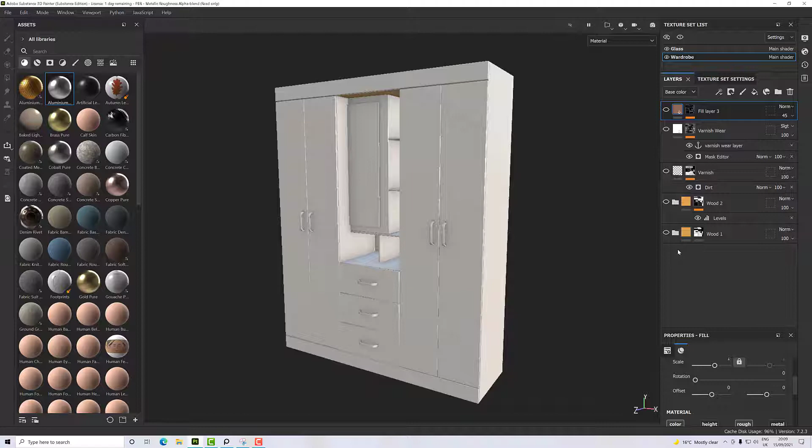Hello and welcome to this Substance Painter tutorial where we're going to be building up some wood on this furniture piece. Essentially we'll build up some layers from bottom to top to build a nice wood texture with some variation and dirt and wear. We'll start off with these bottom two layers, which will build our basic wood texture, and then on top of that we'll add some varnish and some varnish wear, and finally some dirt to give us a nice basis for a model. You can take it further than here, of course, but in this particular video we're going to leave it at that.

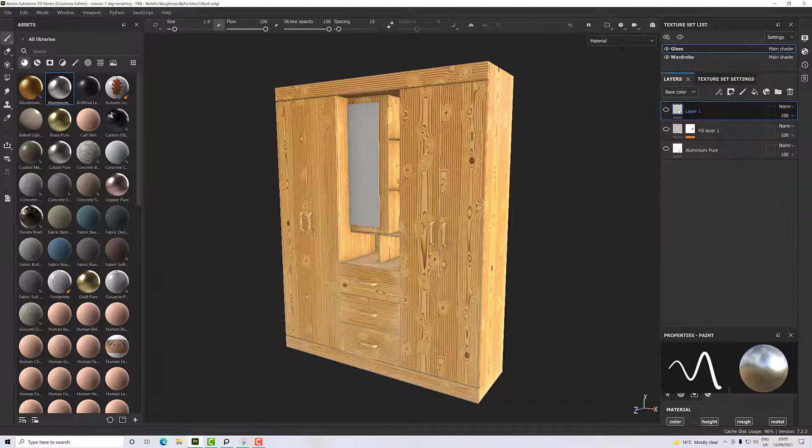And then on this glass, which is a mirror, we'll add in some details. You might notice that I've added in some textured model detail to the top, and we've got a mirror and we've got some smudges and dirt on the mirror. So that's what we're going to learn, and I hope you enjoy it. I hope you get something from it, and I'll talk to you in the next section.

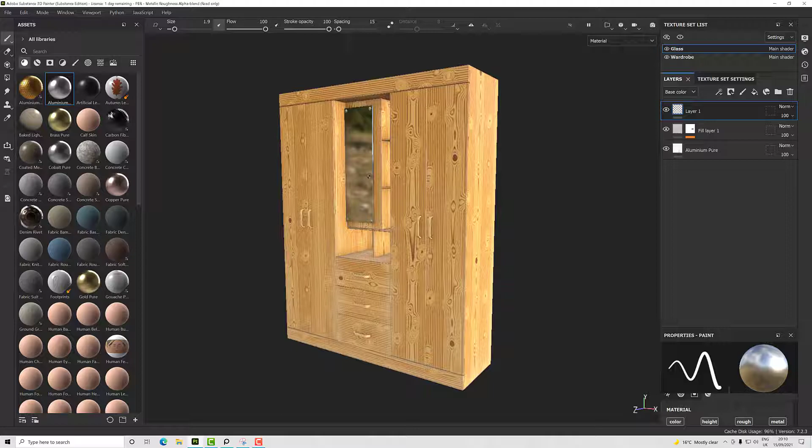Okay, so let's get cracking and create our project. So it's File, New. I'm using PBR Metallic Roughness Alpha Blend, and I'll go to Select and select out my model, and then I'll set my document resolution and normal format DirectX. Use OpenGL if you need to, and other than that I'm going to click OK.

Now the first thing I want to do in this one is bake my maps, and then just show you why sometimes it's a good idea to refine your maps. So let's go over to our texture set settings and click on the little box with the cross and bake the maps out. I'm going to bake them by default to start with, and then we'll have a look at them.

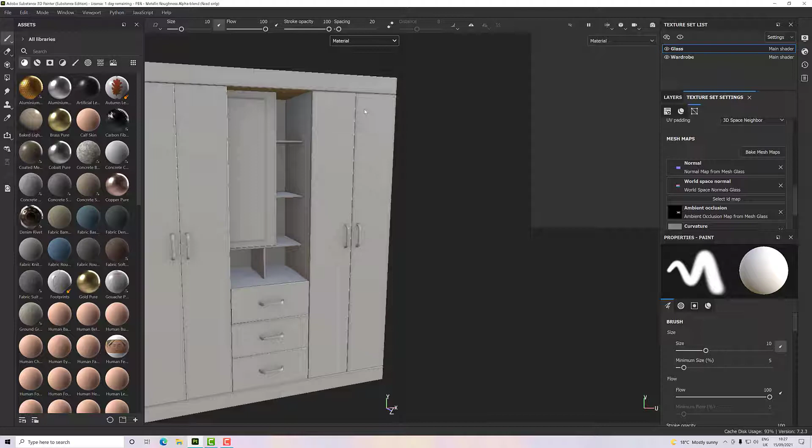So what I want to look at here is my occlusion layer. Under mesh maps, ambient occlusion, you'll see it's very dark in the shelf area because there's no light getting in there, not much light at all. And if we use that as an effects map, it's not going to be very good because it's going to spread that effect all in those places. It's going to be very concentrated.

So what I want to do is adjust my baking to get a better result. What I'm looking for is the occlusion between corners and edges and such like. So let's look at that. Back to our baking in the maps, and actually I'm going to put this up to 2048 as I should have done, and we'll rebake everything.

On ambient occlusion, I'm going to change my maximum occlusion distance. If I change it down to say a half, and then click apply to all, because in this particular object I have more than one material, I'm going to bake those out and see what effect it has. There we go, not an awful lot.

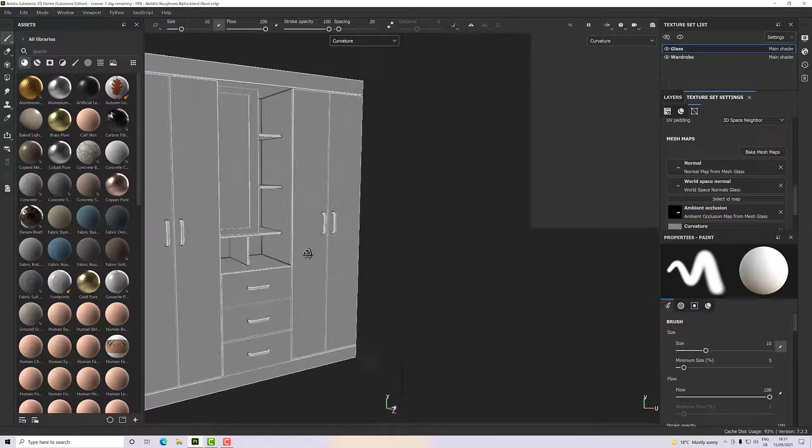Yeah, so it's starting to really come and delineate between the two. Okay, so that's baking our maps out. I'll just switch back to my material mode, and this is our kind of starting point.

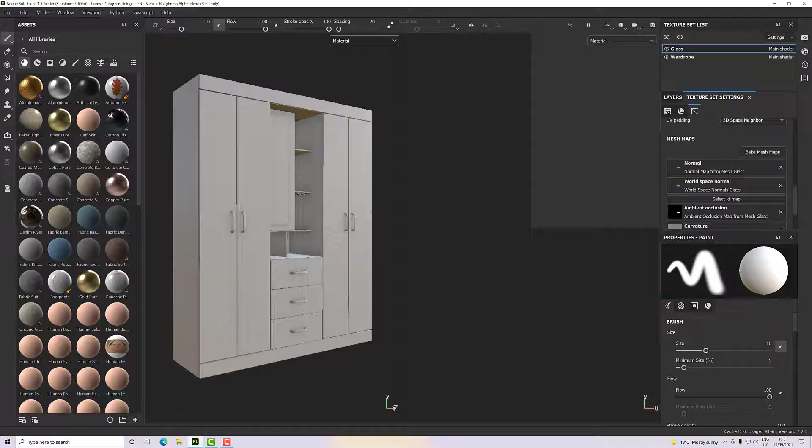So in the next section, what we'll do is build something that looks like wood, and we're just going to use functions within Substance. We're not going to use any images or anything. I'll deal with images in another tutorial set, so I'll talk to you in a moment or two.

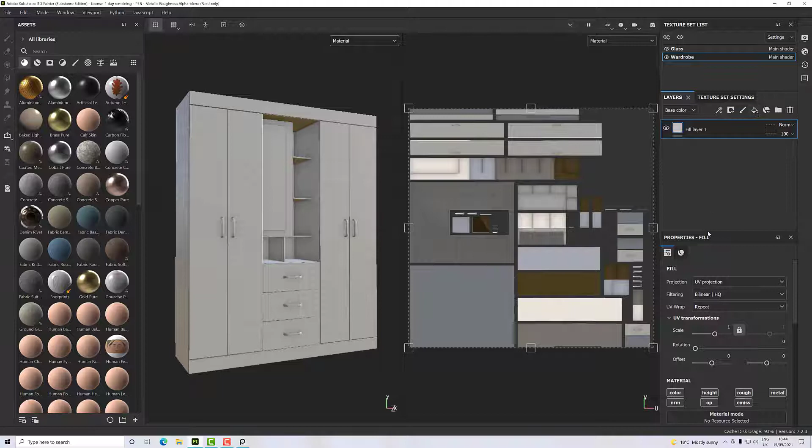Okay, so we're ready to start texturing now, and I've just switched over to my wardrobe material. I'm going to go to layers and delete this default paint layer. Now what we're going to do is use a texture function and a color gradient to make something that looks like wood. So in here we'll first need a fill layer, and for this fill layer I don't want anything except color, and there's a reason for that which we'll get to in the next section.

So then in our textures, in my filter I'm going to type in wood, and we've got this wood 01 here, which is a pretty good approximation of a wood pattern. So I'm going to drag and drop that into the base color. First of all, it's way too big, so I need to update my scale on my UV tiling. I'm going to set that to about 4, and now it's giving us a kind of wood look, but there's no actual color on it.

So to turn this from black and white to color, we add a filter, and the filter we select is gradient. By default the gradient gives you 3 colors to work with. I'm going to need a few more colors than that, so I'm going to go up to 6, and to set this up so it makes a little bit of sense to me, I'm just going to change my colors here.

So I'm starting with black, and then we'll go to a dark grey near black, and then a little bit lighter than that, and then a little lighter again, a little lighter somewhere near white, and then finally we'll go to white.

And now we need to set our position. So the color gradient works on the position in the gradient where this color kicks in. So our color 1 should be on 0, and then we need to kind of equally divide, to start with at least, between these ones. If I set 0.2, 0.4, 0.6, 0.8, and then the last one will be 1.

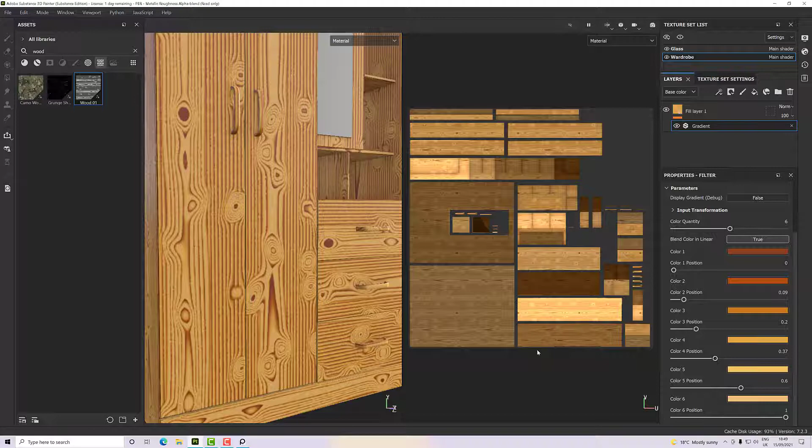Now you might decide later on that those colours aren't right, or you want to lighten some up or darken some even. You could always do that at any stage in the operation essentially. Let's take some of the... there we go, somewhere around there.

Okay, so what we have now is a very basic wood, and what we're going to do in the next section is start to build on this wood to give it some character, and then we'll build layers on top of it to break it up and make it our own, and make it look a lot more like wood. Okay, so I will talk to you in the next section.

Next then, I'm going to add some variation in terms of how shiny and how our height is generated, and I'm going to do it on a different layer. Now you might think it's a bit pointless, but I have my reasons, so as I go, I'll explain why.

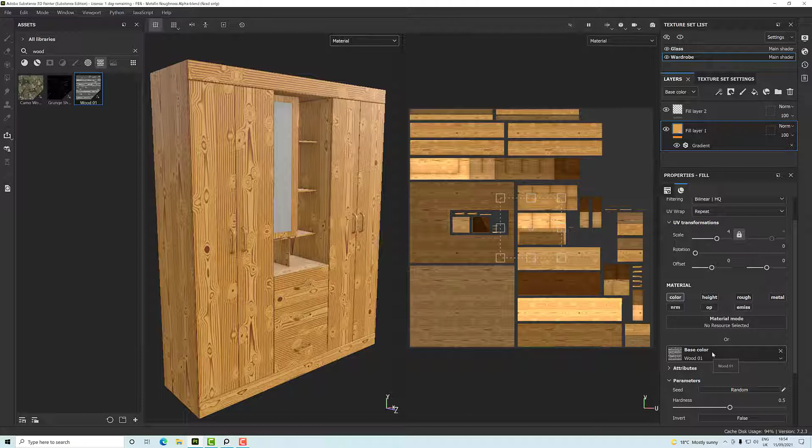Let's add a new fill layer, and this time I'm going to turn off everything but height and roughness. Now if I want to use this function again, this wood, base wood, I would need to put it in each channel with identical settings, and if I have a lot of channels that's going to take me a while.

So what I'm actually going to do is, to this layer I'm going to add a black mask, and on that black mask we're going to add a fill layer, and that gives us a chance to drag and drop our wood in.

So on our original, we made a couple of small changes. Hardness and knots is 1, and here we have hardness and knots is 1, that's fine, but our scale is 4. So let's update the scale, because we want them to match, we want them to be exactly the same settings. So now that I've done that, I can go and have a look at my mask, and should see that it actually matches the underlying very, very well.

And now if I increase my height and increase my roughness, I'm going to get some variations. So let's go to the roughness layer to start with. It's a little difficult to see, but if I increase that, you'll see we get some very white areas, and if I decrease it we get some very black areas. What I want is somewhere towards white.

And similarly on height, if we switch to the height channel - where's the height channel? There it is. We can adjust this down. I only want a very small value, and you'll see that darkened up quite a lot there.

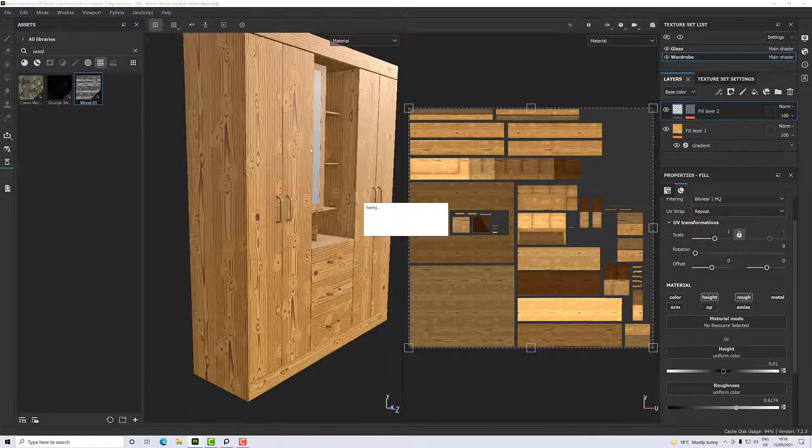So now we've matched those to our original. I'm going to group them together. So I'm going to add this folder and then grab my 2 layers and drag them in, and I'm just going to call this Wood 1.

Because what we're going to do in the next section is we're going to copy this and update our wood settings, and maybe change a few other bits and pieces, and then we're going to have 2 different kinds of woods on different planks in this model to give us some nice variation. So I'll talk to you in a few moments.

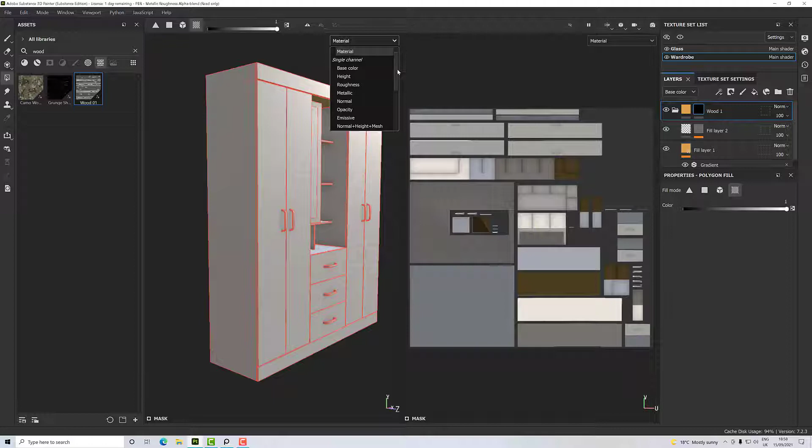Okay, so what we're going to do now is create a mask. We'll add a black mask, and on this flood fill polygon we'll select the islands option. I'm going to switch to the mask view so it makes slightly more sense. So everything is currently masked, so none of this is being applied.

When I select an area, you should see it starts to appear, and I can select in 2D or 3D, it doesn't really matter. You just need to make sure you've got a good amount selected. So there we go, I'm going to select the whole of the cabinet, I think. Yeah, and then one of these doors.

I'm torn between the left and the right. If I go left, it looks the same. Oh, excuse me, sorry, frog in my throat. It's my own fault.

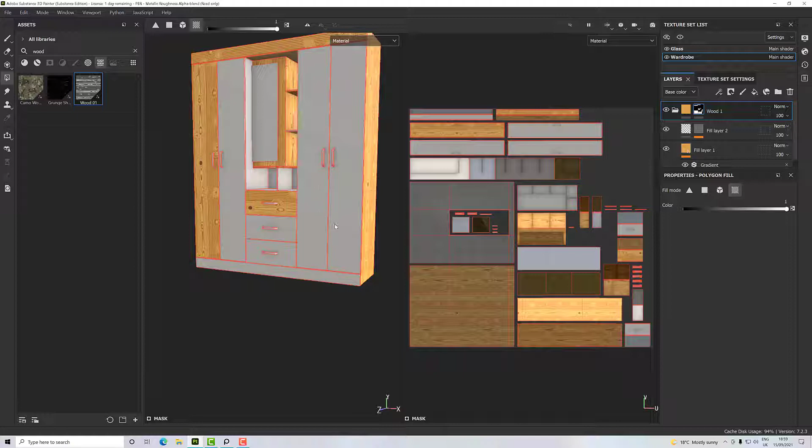So let's go with that one, and we'll pick the bottom drawer, and we'll perhaps pick the bottom of the cabinet and the top. We can always change this as we go. This is just us getting kind of used to it, or getting a start. So what we have now is some bits that are textured and some bits that are not.

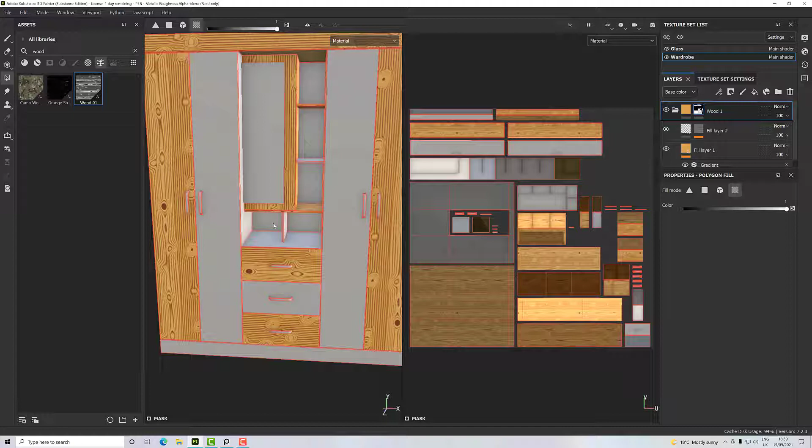So what I want to do is retexture the blank bits with a slightly different wood. I'm going to add a new folder, and then copy these layers. So it's right click, copy layers, select the folder, right click, paste layers, and if I collapse that, yes. So this one I'll call Wood 2.

Because I want them on the opposite polygons to this mask, I'm going to right click on this mask and copy, then right click and paste into mask, then right click on the mask and invert it. Now we're back to exactly where we were, except we have slightly more control now, because on this set we can do some things.

So one thing we could do is select our texture and change it. We've got a hardness and a knots setting. I could really take the knots down on that one, and that will give us a different looking wood. I could take the hardness down, or indeed up, to again get a different looking wood.

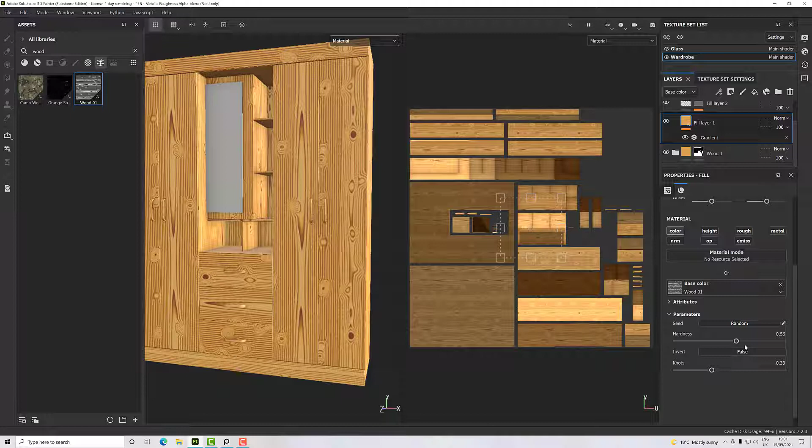But the slight peril of this is that I need to recreate these on my height and roughness layer. So what I do there is just get up the old snip tool and take a snip of the area I've done changes on, then in PureRef I can paste this in, and because of the nature of PureRef I can just go to my other layer and pick my texture and very easily set my settings without having to switch screens or remember too much, because if you recall, I am an old man and prone to forgetting things from moment to moment.

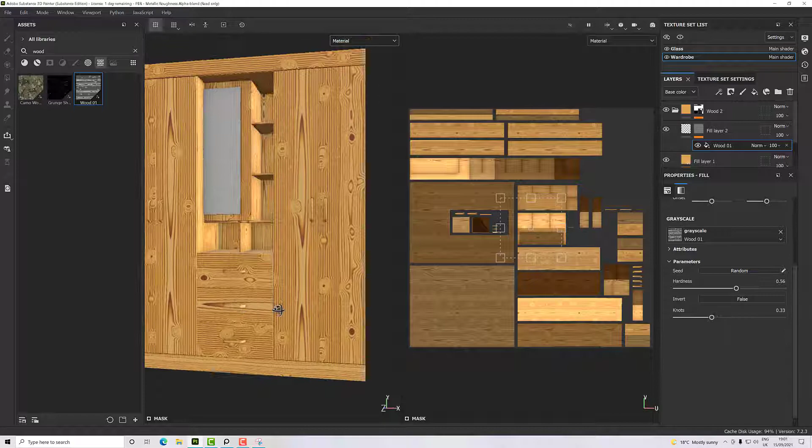So now I've matched them up, but there's not much in the way of change in all honesty. It still looks like it's from the same tree because it's the same colour, exactly the same colourings. So if you wanted to, on the gradient you could change up these colours a little bit.

You could either change them to a completely different level, change the positions, or even just change the colours. So for example, if I really drop the position of colour 4 here, I'm going to get a slightly different look. I could increase the position of 2 and I'll get a different look. So it's just a question of tweaking your parameters to get it looking a little bit different. There we go.

So rather than looking completely the same as the other set of planks, we've got a slightly different look. It breaks it up a bit to give it more of an element of, you know, this is a real thing. Variation is quite important, even at this base level where I'm not really expecting to finish, I'm just expecting to get it to look reasonably good.

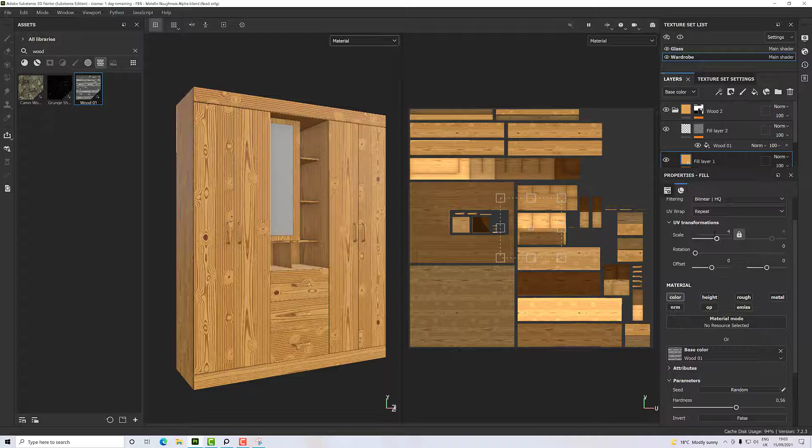Okay, so what else could we do in terms of that? Again, we'd need to be careful about our positioning on the base texture here. We have scale, rotation and offset. We could offset this by moving it around. So if I increase this offset, you'll see it's changing position - offset in that direction or offset in that direction. And I'm rather keen to not have too much in the way of vertical things going on.

And yeah, somewhere around there. And it just so happens that these two planks are occupying what looks like a similar region. So what I actually might do, if I was being really conscientious, is swap those out in the mask.

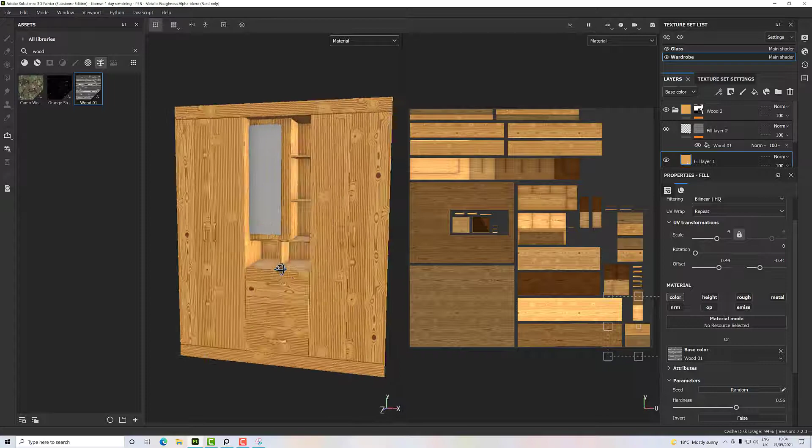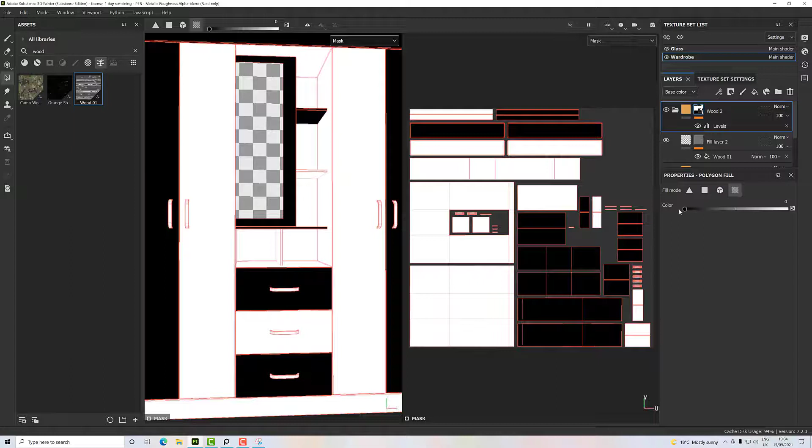And that's relatively straightforward. So if I go to the wood here and click on my mask to show it, I can see this is white. So if I take that down to black and click on it, actually because I've inverted it, it's white. So if I leave it at white and select it, it will remove itself from this one.

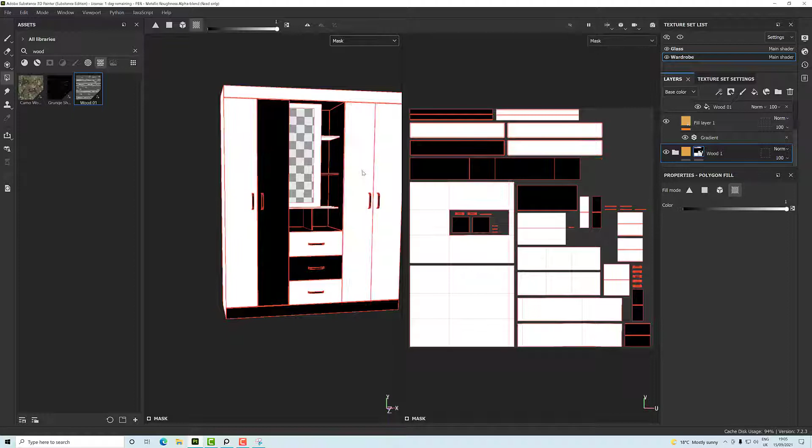But in the material it will have nothing on it, so I just need to go back to this one and change it here. Let's go and have a look. It's not selected here, so I'll just click over that and now it's selected. So when I go back to my material, now it's picking up a different one and looks a bit better.

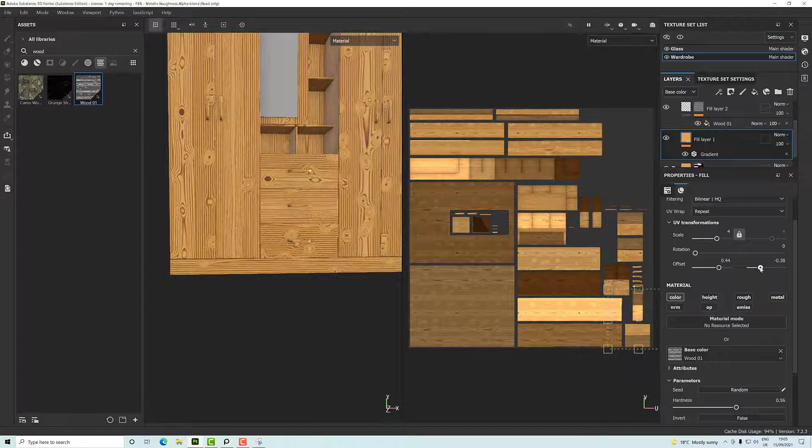I've noticed that when I did my move—let's have a look—that these two now look a little bit similar. So I'm just going to adjust that a little bit so that they're not. There we go, something like that. So that's good, I'm happy with that.

Yes, not a bad start. So I do need to recreate those changes on the height and roughness area. Let's pop that into PureRef so I know what settings I need to make, and go back to my wood and set them in there. So 0.44 and minus 0.38, and that should now line up properly. Let's minimize PureRef, and if I have a look around I should see that the dark areas...

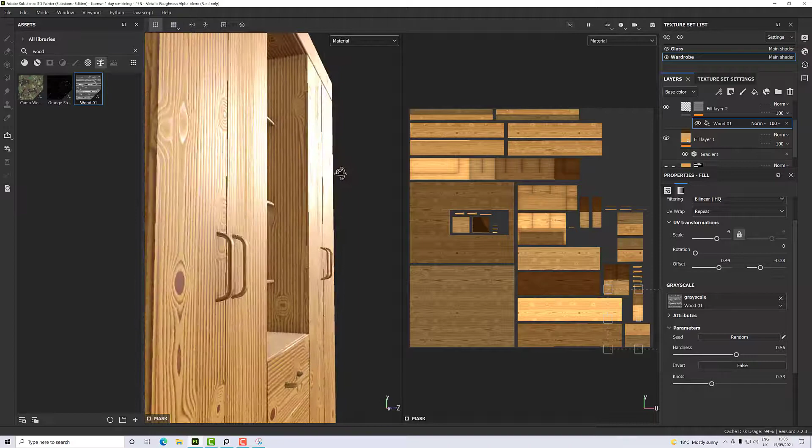In the next little section we'll start to build up some information about where it is. We'll start to wear some edges—on the ground we might put some wear because it's been sitting on the ground, perhaps some wear on handles or something along those lines. Just things about where people might have used it and therefore the feel has changed. So I'll talk to you then.

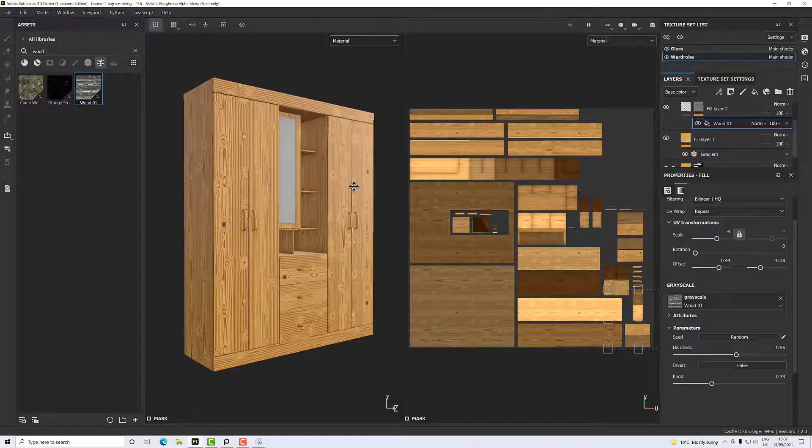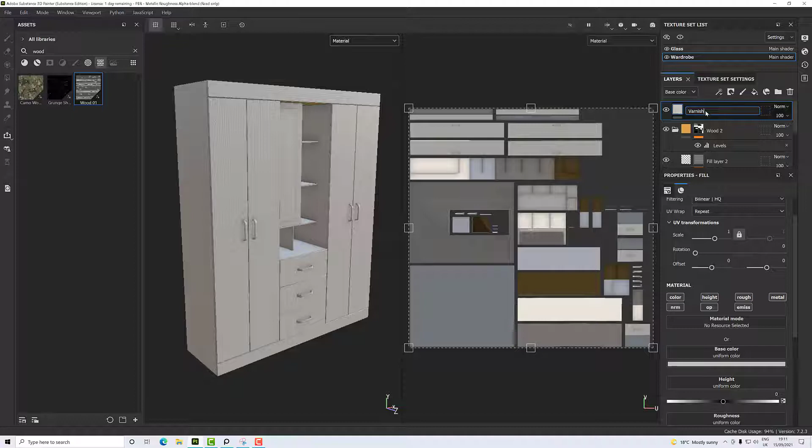Okay, so we have a reasonably nice kind of wood plank effect, but not necessarily varnished. So we're going to add a layer above our Wood 2, and we'll call this layer Varnish. It's a fill layer, and for this one we don't need anything but our roughness map.

There we go. So we're going to set our max level and then we're going to wear it away. If I go right up to white, it's minimal, and if I go right down to black, it's super shiny. So I don't want it super shiny, but I do want it perhaps halfway between black and the midpoint—perhaps a little bit darker than that. There we go, so now we have a very shiny wardrobe which is not really reflecting what's going on underneath.

So that's okay. If you wanted it to reflect what's going on underneath, we could change the blend type on our roughness. Currently it's normal, but if I put it to multiply, it's going to take a little bit of the information from our roughness that we put underneath.

I'm going to leave it at normal for the moment, and then what we'll do is add some dirt over the top of it. So we can either add a black mask here, or we could add a black mask above. I'm going to add it here for the moment. So I'm going to right click, add a black mask, and that will take the effect completely away. And now we've just got our underneath roughness.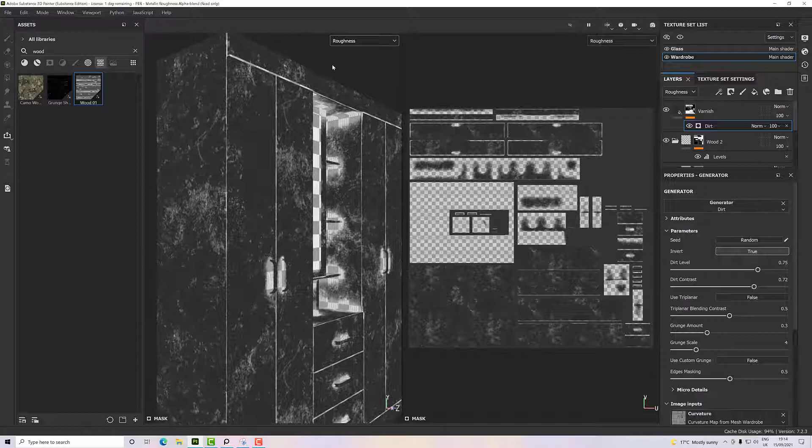So let's go back to our material layer, and now I should have some very subtle bits all over the place where it's not as polished. You see where the shelf meets the vertical here, that's got a lot of wear around it because of the occlusion mask, or the occlusion map.

You know, because that's there, it's giving us a worn effect. And you can imagine that if people are putting books in and out or knickknacks in and out, that can happen. So get it set to where you're happy with it.

I think if I just go and have a look at the mask again, where's the mask gone? There it is. What I might do is change my grunge scales. So if I take my grunge scale down, I'm going to get bigger patches. And if I turn my grunge amount up, I'm going to get even bigger patches. You see, I'm getting a real contrast now between the two. And I want it somewhere about there, maybe. I don't want it to be too obvious, but I do want it to be obvious for the case of an example.

Okay, so let's go back and look at our material layer, and there we have it. I think I can start to see, you see behind the handles where you can imagine people brushing that as they grasp the handle and wearing it away.

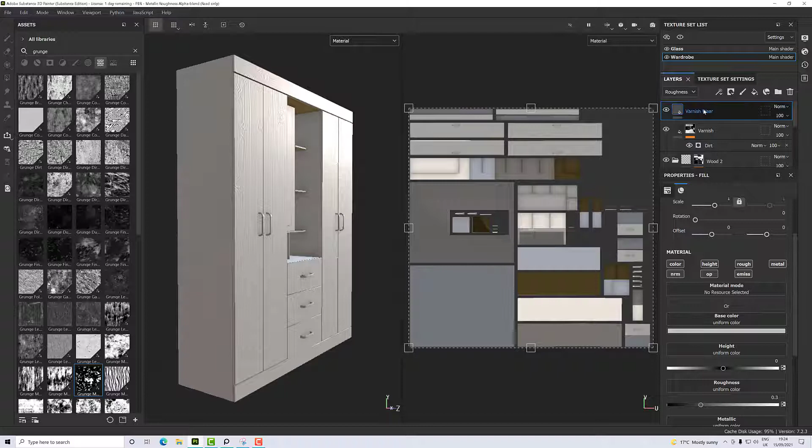And I'm going to leave the colour and everything else on at the minute while we build our mask up. So I'm going to right click and add a black mask, and to that black mask I'll add a generator, and for the generator I'm going to pick the mask editor. So immediately you'll see that the edges are highlighted now where that mask is allowing that texture to come through, and that's because the mask editor comes with 0.5 of curvature immediately. So if I take that off, you'll see it disappears, and if I turn it right up, you'll see it gets stronger and stronger.

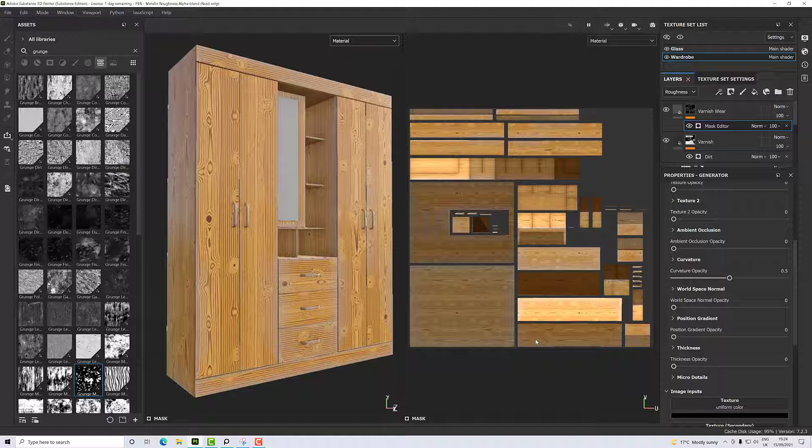And that's great, but I want to add to this some noise and some positional data. So for positional data, I'm going to use the position gradient, and I want the wear to come at the bottom, so I want the white to come at the bottom in this case. So if I increase this, you'll see the white comes in at the top, which is of no use to me at all. So I'm going to just go into the position gradient options and check the invert button, and now you can see it's coming from the bottom. So I'll just adjust my position to get down so it's a little bit more subtle.

Okay, so to this I also want to add some noise. So we're going to use the texture for that. In this texture input we can get it to interact and blend with our whole mask. So I've just gone to my textures folder here and typed in grunge, and I'll pick out this map down here, which is map 4, and drag and drop it into texture. Now nothing will immediately happen because I haven't turned it on. So let's go up to texture and just increase the opacity on that, and you'll see that it starts to put patches all over the place and interfere with our edges, which is kind of okay but not exactly what I want.

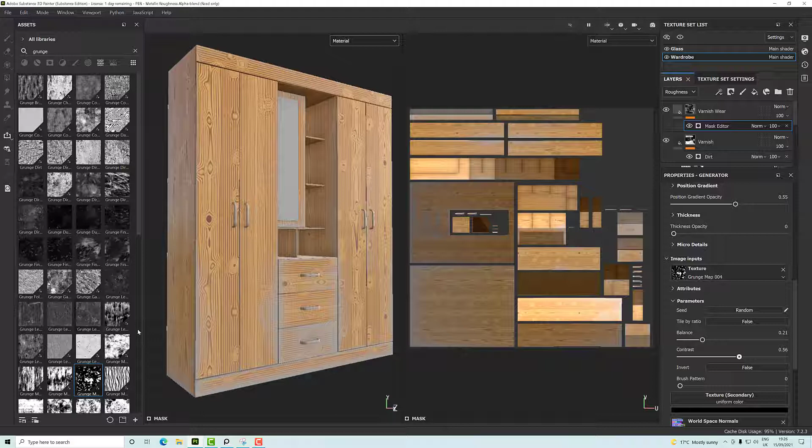So first of all, on the texture itself, I'm going to change some of these options. So let's change the balance down to make it more subtle, and the contrast also to tighten it up a little bit. So the mask is showing things up quite well in some places and not in others, but it's not all linear anymore. You know, you might not want this particular one. You might find that that's not quite the right thing for you, and we can use other maps in there. Of course, it's a question of picking and choosing which one you want.

So I'm going to go for this spatter one here and see how that looks, and yeah, I quite like it. So we've got some small spots away from the edges. We've got some additional spots at the edges, and that kind of works really nicely.

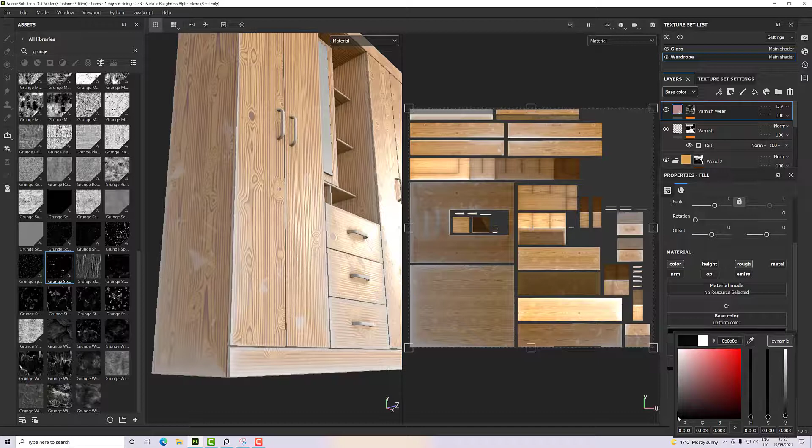So let's try divide. Doesn't seem to do an awful lot, but let's take that up to really dark. You'll see that if I go sort of into the grey, it's making it kind of yellowish, which I'm not sure is the best plan. And if I take it to black, it's really yellow. That's the wrong one, sorry. Sorry, that's me being dumb.

Yeah, so let's try that again. Now I've undone too far. Okay, so I do want it to be a little yellower perhaps and a little paler, but maybe not that much. So let's try taking down our blend, and that's not really doing it for me.

So let's try another option of maybe soft light. Let's change the colour again. If I go dark, it's going dark. If I go light, it's lightening up a bit. But I've got my layer blend down, so let's take it up. There we go. So I've got a soft light with 100% opacity, and that's adding a little bit of difference.

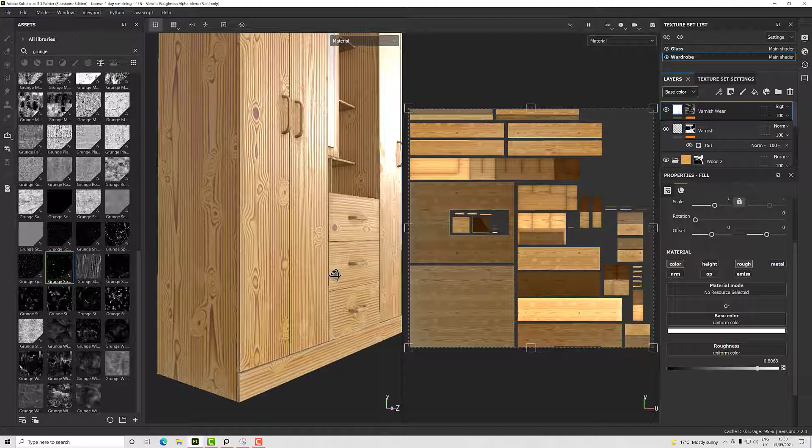You know, where there's no varnish, the wood has paled and worn away and has been exposed to air and light and so on and so forth. So it's got some difference to it. Okay, so with that done, what we'll do next is add some dirt and edge detail into our model. So I will talk to you in the next section.

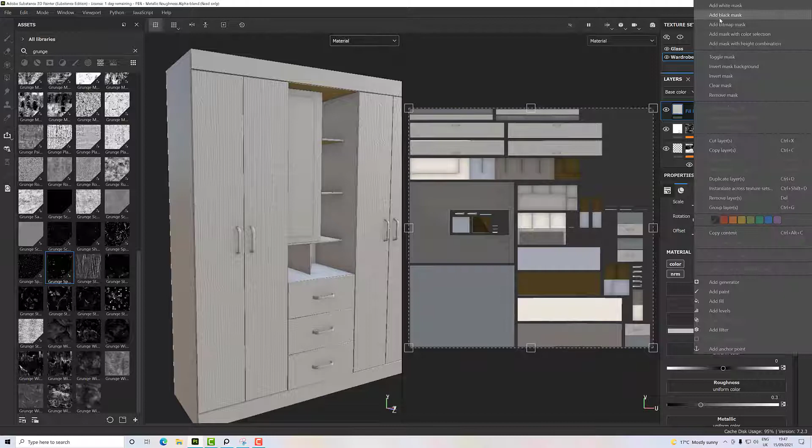Okay, so now I want to add a bit more dirt in general, and unfortunately for this I don't really want ambient occlusion to be taken into account because it puts too much dirt in darker areas. So what we'll do is add a fill layer, add our black mask, and then I'm going to add the mask editor generator. So let's add that in.

So see, it's going to put dirt where we've put our wear already, and I don't really want that, or not so much. So I'm going to take the curvature down so it's not in exactly the same place. And I'm also going to open up the curvature and change my options.

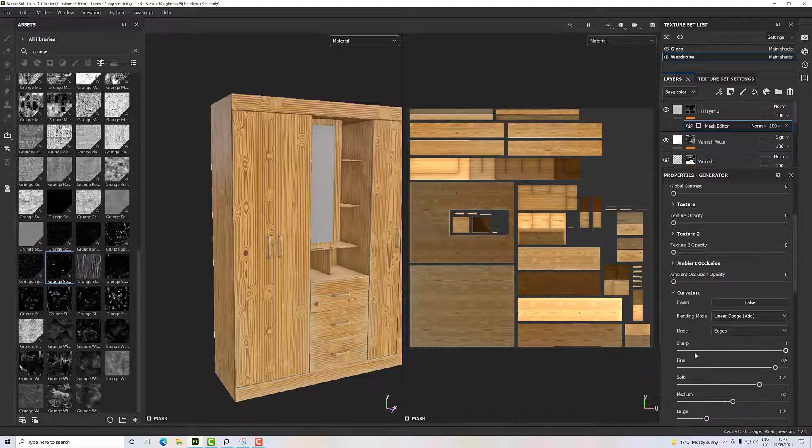So let's go to the mask view. That's what our mask looks like now, and I'm going to take some of the bigger elements of this away. There we go. So it's really tight to the edges, and now I can take my opacity and bring it up, and it will be a bit happier about things.

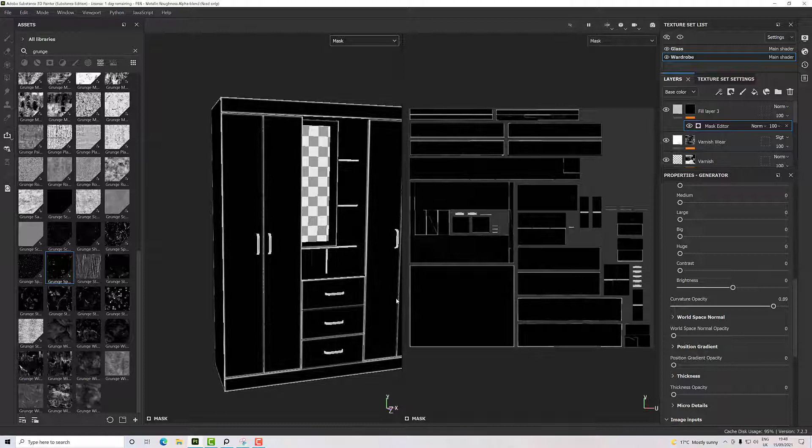So there's a lot of dirt on the handles. It looks like it's going to put a lot of dirt on the handles and a fair bit on the edges, but it's really tight to those edges. It's not going to interfere with our previous layers too much. It's going to add to it.

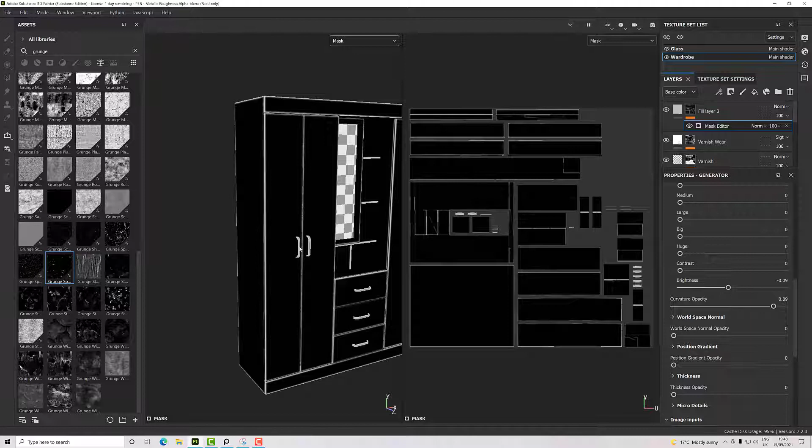I can take the brightness down, but I think that's counterproductive. What I actually want is not to have it on the handles at this point, because those handles are too much. So let's pop a fill layer above this.

Actually no, it's not a fill layer, I want a paint layer this time. So it's right click, add paint, and in this paint layer I want to select these handles. I'm on the mask layer currently, and I'm going to click on these handles, and that fully adds it. But if I slide down to black and click, it will fully remove them.

So that's what I want in this particular case, because if they're that dirty, it's just going to be completely unrealistic. Okay, so now we can continue with our mask editor to build up our mask. On top of that, I do want a little bit of some other things. We perhaps have a little position, which of course I want to invert, and I'll take the balance down so it's sort of tending towards the bottom, and I'll increase the contrast a bit so it's a little bit tighter.

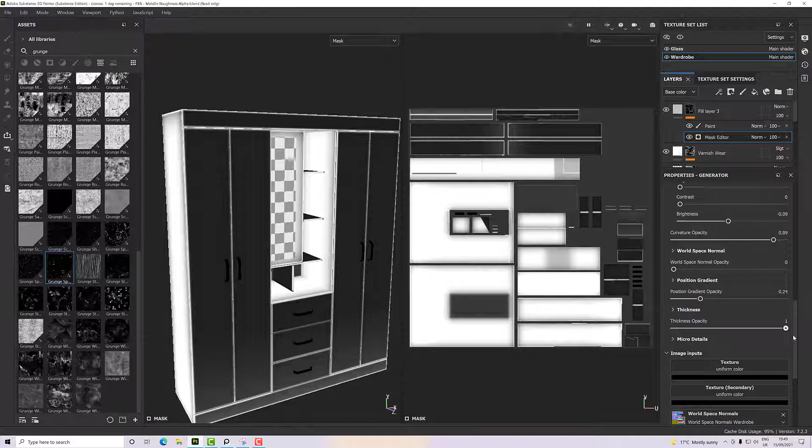And what else will we use? I think this is interesting, it's kind of the thickness of the mesh. If I turn that up, you'll see it starts to highlight the thicker bits of the mesh, but I don't think that's going to be useful to me in this particular case.

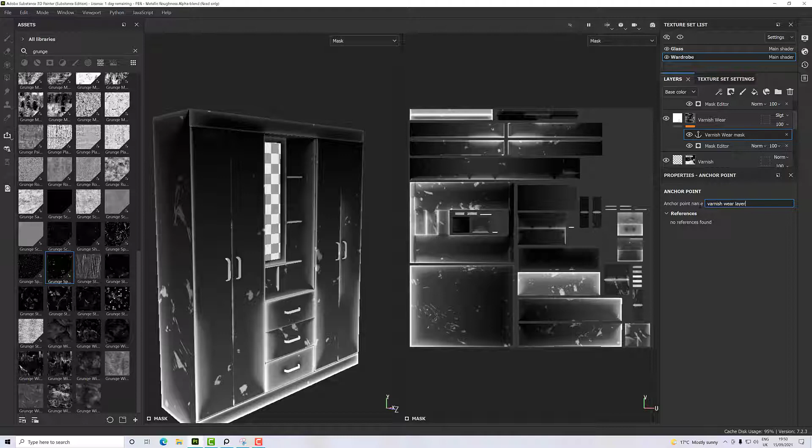Now, you'll notice down here we have micro normal and micro height, and I wanted to show a bit on those. So on our previous wear layer we had our mask editor, which gave us some wear and things and height depending upon where everything is, and I want to exploit that. So to do that, I right click and add an anchor point, and this is our varnish, just so I can identify it. It's our varnish wear layer, and now in our mask editor we can reference that anchor point.

Let's go to our mask again, and I'm going to use the micro height for that. So in micro height I can now pick from resources or anchor points, and I'm going to select the anchor point, and all I need to do is tell it what layer I want to use. Actually it's not giving me that option, but that's okay, perhaps that's a new version. Previously I've had to tell it what I want to do, whether I want to use height or colour or otherwise, but I've got a new version recently and perhaps that's an update.

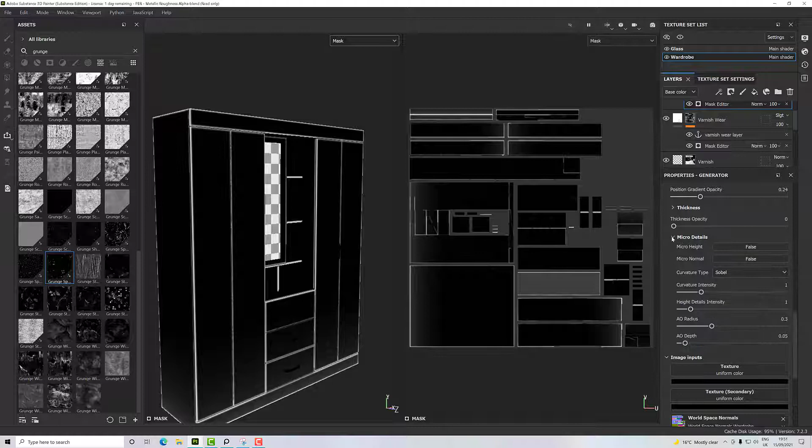So under micro details I can now enable micro height, and you'll see that immediately adds that underlying height data to my mask, and I can affect the way that works by adjusting these sliders. So I can take the intensity down, the curvature intensity I can go up and down, and I want it to be quite subtle, so I'm going to take these down quite a lot. And let's try no effect. I believe, but I don't know for sure, that these AO ones are more down to the normal than the height map.

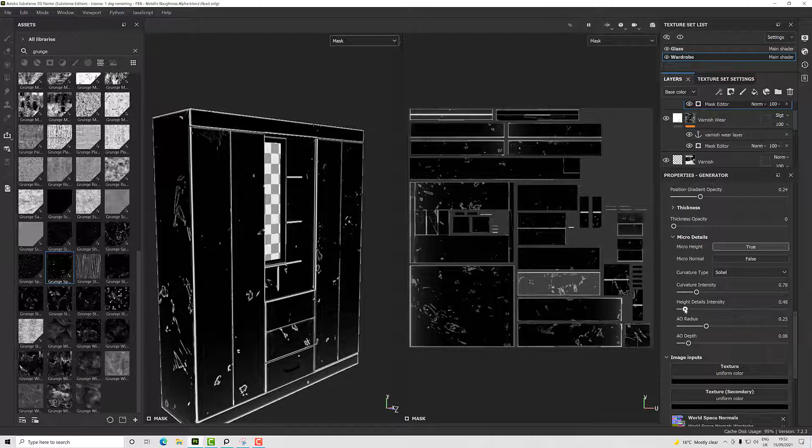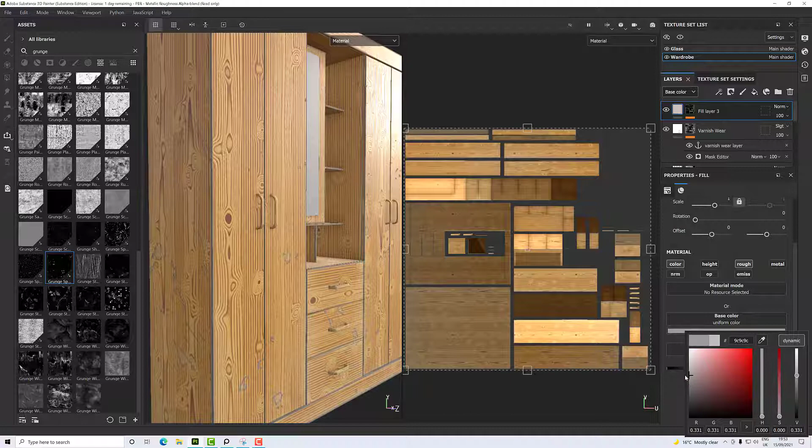I want the roughness to be high, perhaps not quite as high as the other one, and let's put in a greyish colour to just show that it's a bit sort of dirtier in those areas. Doesn't look particularly great there actually, so what I'm going to do is use my colour picker, left click and drag over, and I'm going to pick one of the darker colours within the wood, and then we'll adjust it. So I'll take that down a little, perhaps take some of the saturation out, just so it blends in a little bit better. There we go, so now we have dirt, and of course you can adjust it.

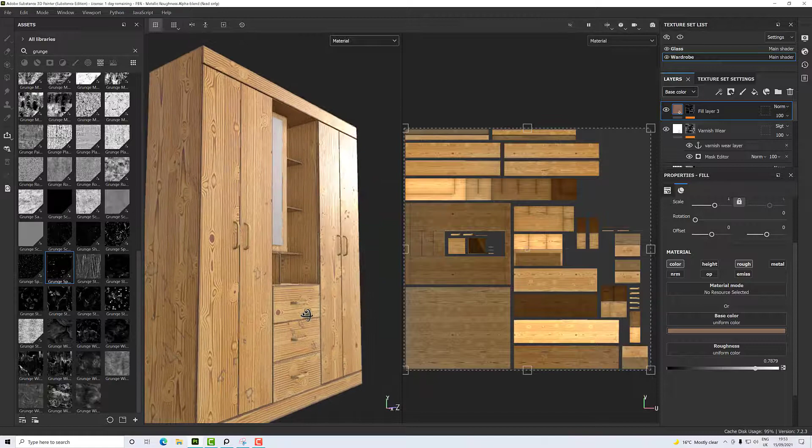So on my base colour, it's too strong currently, let alone the colour being too much. So let's take the blend strength down a little bit so it's a little more subtle. Subtle is always nice.

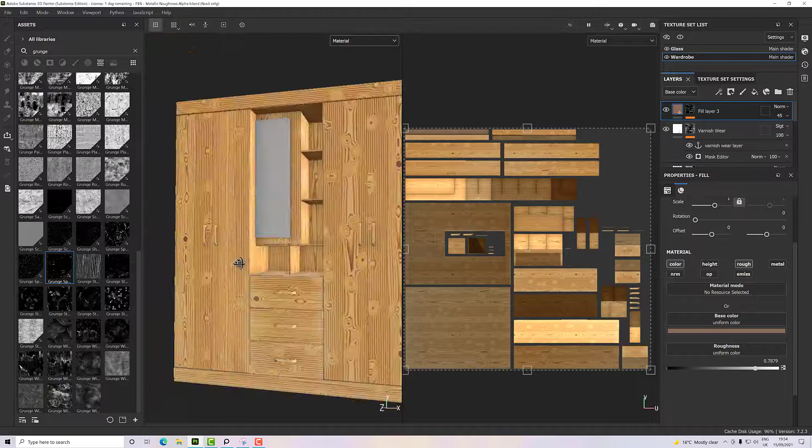Okay, so I think all we need for this now is a bit of, how can I put it, decoration. We've got to do the mirror. I think I might change, I was thinking about changing the handles out, but I'm not sure. Yeah, so let's have a look at the mirror in the next one, and then we'll go from there. Okay, so I will talk to you then.

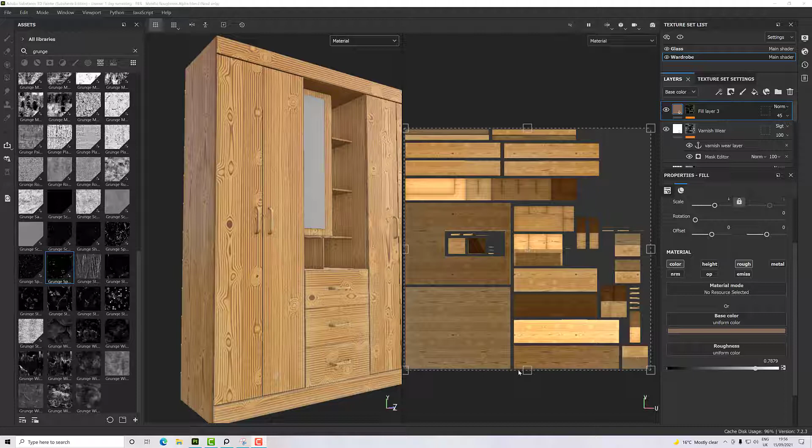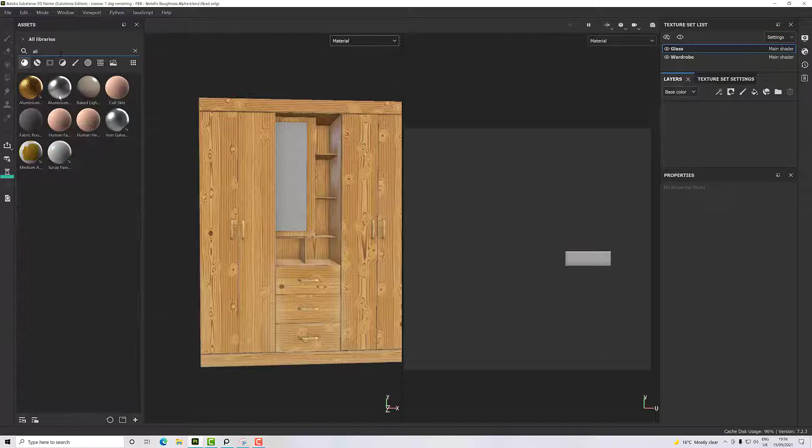Okay, so let's look at the mirror then. This should be a simpler piece. We've got our glass map here, and what we'll do on the layer properties or the layers, we'll delete out this paint layer, and then in our libraries we'll go to materials, and let's have a look at aluminium, because that's going to be a good start. So you'll notice that aluminium comes in and it's quite flat, not very reflective, and that's because the roughness is turned up a little.

So the more we take that back, the more you'll see whatever environment you have reflected in the surface. It's a matter of choice as much as anything as to what you want to do for that. I'm not going to have it perfect, I don't think. I don't like perfect. So there we have a mirror, but it's, how can I put it, really plain.

So let's add a couple of layers on top of this. Another fill layer, this one I'm going to do with roughness, and I'm going to increase the roughness over and above what we had originally, then blend it with a black mask and a generator. For this one I'm just going to go with dirt, and you'll see that now we've got kind of a smudge in our mirror, many smudges.

If I go to the mask, it will be easy to see. There we go. So I've got a big smudge down here where the occlusions come in, but we can reduce the level of dirt, and we can increase the edge masking because I want a little bit more of the edges.

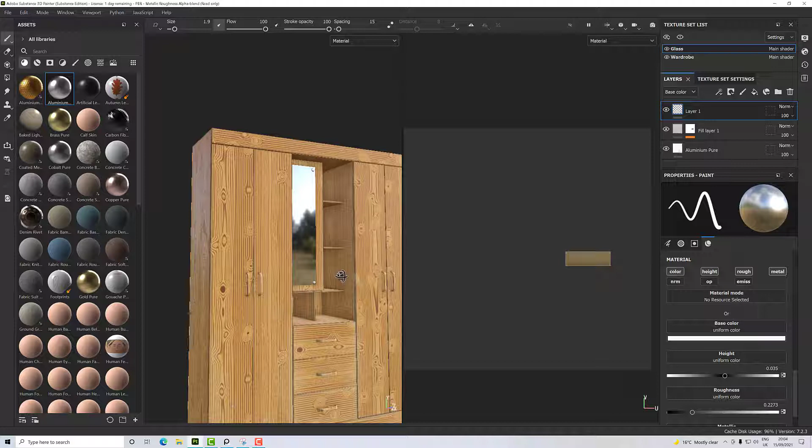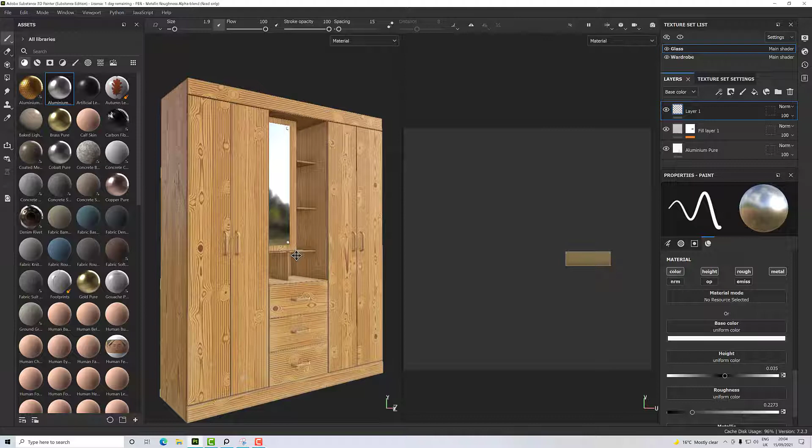Okay, so I think that's essentially it. I will do another video where I decorate it using some other tools, but for the moment I think this is as far as I'm going to take it. And I hope you enjoyed it. I hope you come back to watch more things, and take care and have a good time. Talk to you soon.